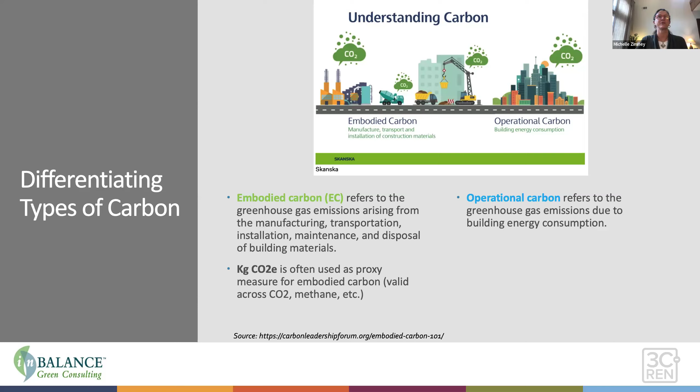When we talk about carbon, we often use kilograms of carbon dioxide equivalent, and you'll see that a lot in some of the documentation. That's used as a proxy measurement for embodied carbon. It's also the unit of measure for global warming potential. So let's take a quick look at some other terms. Here's global warming potential, and we see that that proxy measure is there. We'll talk about EPDs and HPDs.

The difference being EPDs are environmental product declarations. Those are the main documents that we look for to get global warming potential data on products, versus HPDs, which focus more on health impacts, such as toxins and pollutants.

You'll hear us refer to LCA and WBLCA. They're related, whereas life cycle analysis is a systematic analysis of the environmental impact of a product or material. A whole building LCA is an assessment using that data on building systems and materials as a whole.

And then a couple of units of measurement, because there is math, I'm going to warn you. We all know that there are things called tons, 2,000 pounds, but we'll also come across metric tons, oddly denoted in capital MT or small t, slightly larger, it's 1,000 kilograms, slightly larger at 2,200 pounds.

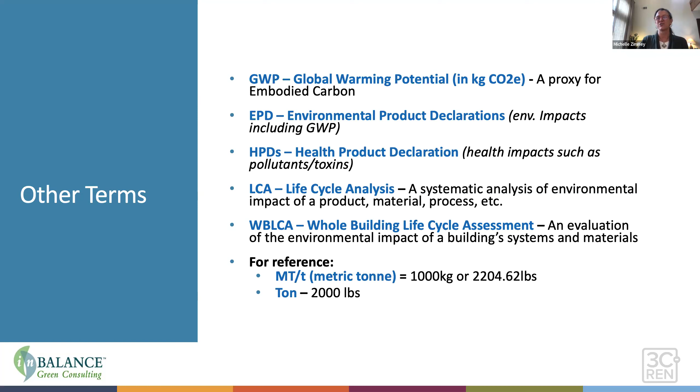Okay, so why care about embodied carbon? This graph might be familiar to some of you who attended our Zero Net Carbon Design series last year. Operational carbon in the light blue and embodied carbon in the green. And we know that up front, the embodied carbon is incurred and part of the footprint of any project the day you walk in a building.

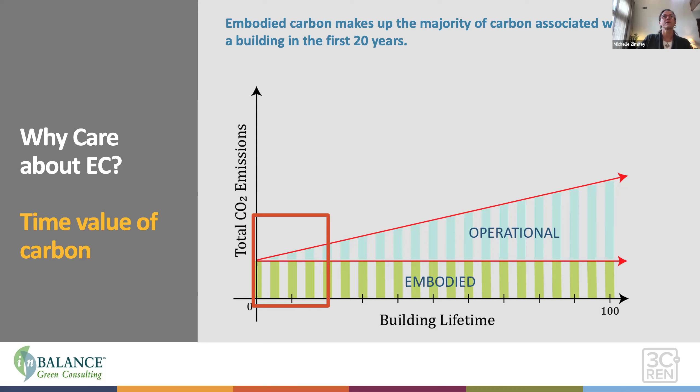And it remains the largest percentage of the carbon for your project well into the first 20 years. Something like 80% of your carbon in the first 20 years of your building is going to be embodied carbon. And so paying attention to and reducing that footprint as you build up to construction is really impactful.

Here we can see the impact on the environment. So reducing that carbon in the near term basically has the effect of getting us on a lower curve. If we reduce this amount, we'll get on a 2 degrees Celsius curve. But if we can reduce it even more in the short term, it just sets us up for a warming curve into the rest of the century that's beneficial for us.

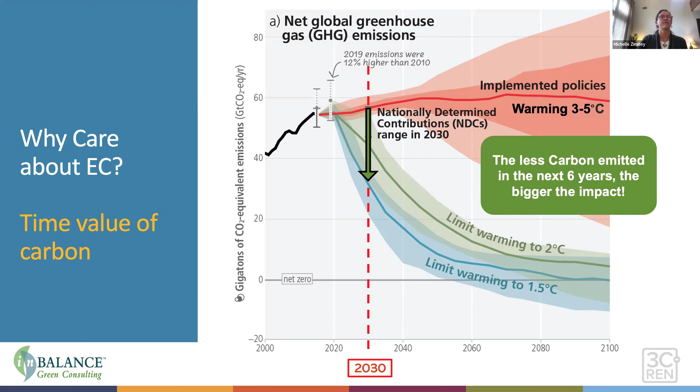Another curve to take a look at is, how are we going to do it, right? What are the steps toward getting reduced embodied carbon measured, carried out, and then where are we going with it? Right now, we've been working on sort of hitting the low-hanging fruit, gathering data, figuring out standardized forms, building calculation standards. Where we're moving to, and what you'll see in California, is moving toward mandatory reporting and mandatory limits on embodied carbon.

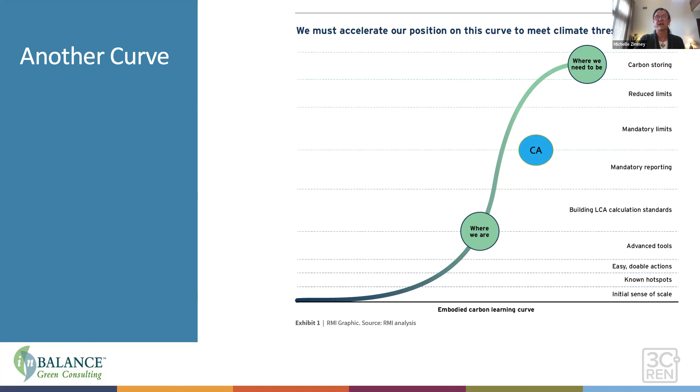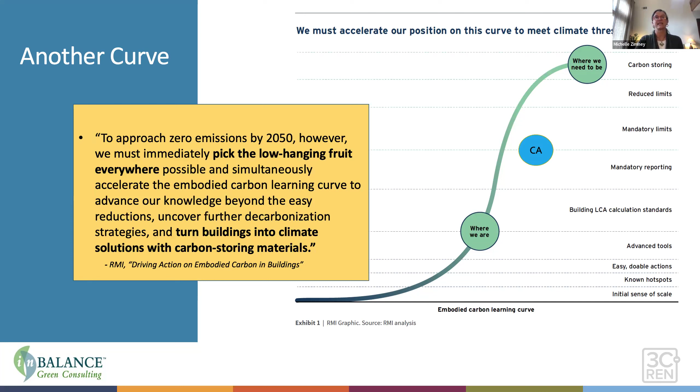We'll talk a little bit about the CALGreen, or a lot about the CALGreen today. And ultimately, where we want to go is keep pushing those limits and moving toward more use of more and more carbon storing materials, so that we can get the low-hanging fruit everywhere possible simultaneously right now as we accelerate up the curve, and ultimately turning our buildings into climate solutions with carbon storing materials.

I'm going to hand this lovely slide over to Tatiana to explain why I care about it in terms of CALGreen. Thanks, Michelle. So why care about embodied carbon? Well, starting on July 1st of this year, you will have to.

Addressing embodied carbon will now be part of the CALGreen mandatory measures just for projects 100,000 square feet or more, or schools under jurisdiction of DSA that are at least 50,000 square feet. And then in 2026, the square footage threshold for all projects will decrease to 50,000 square feet.

So if the threshold square footage has been met, there are 3 different pathways that you can use. You see those here, and we'll be going into each of these in more depth further on in the presentation.

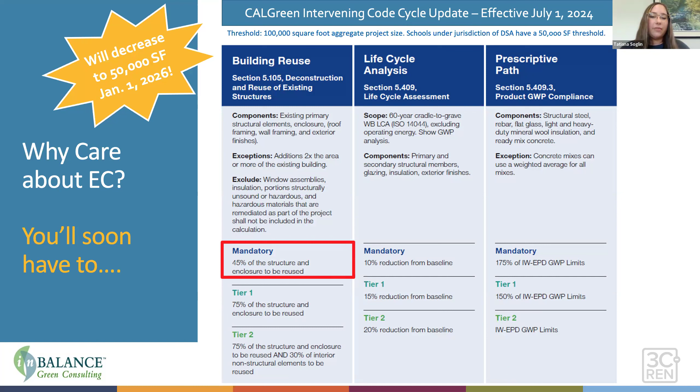So your first option is reuse for existing buildings or additions and alterations. For additions, this will only apply if the addition is less than 2 times the area of the existing building. And to meet the mandatory requirement, 45% of the structure and enclosure must be reused.

The next option is completing a whole building life cycle assessment using approved modeling software. Some of them are free, some also have Revit plugins, and you'll need to show a 10% reduction on primary and secondary structural elements from a baseline building.

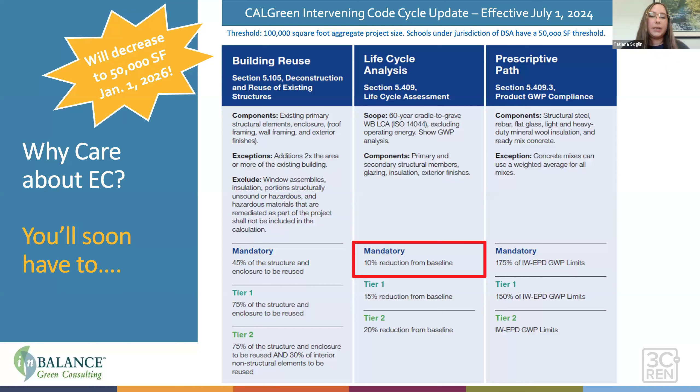The third option is a prescriptive path. So, building on the Buy Clean California program, the code sets global warming potential limits based on industry-wide standards for a few key materials, and all materials listed must come under the threshold. For this mandatory measure, the threshold is set at 175% of the industry-wide EPD global warming potential limits.

And as a reminder, Tier 1 and Tier 2 thresholds you see listed below are voluntary, but some jurisdictions may require this level as part of a reach code or mitigation. Next slide. So now we'll look at where you'll find embodied carbon in the construction process.

So you may have seen a graphic like this one before showing life cycle analysis stages and scopes. Construction is broken down into stages A through D, with A being the product stage, B the use stage, C the end of life, and D the stage beyond the building life cycle. Each of those stages is broken down further into processes like extraction, manufacturing, transport, and so on.

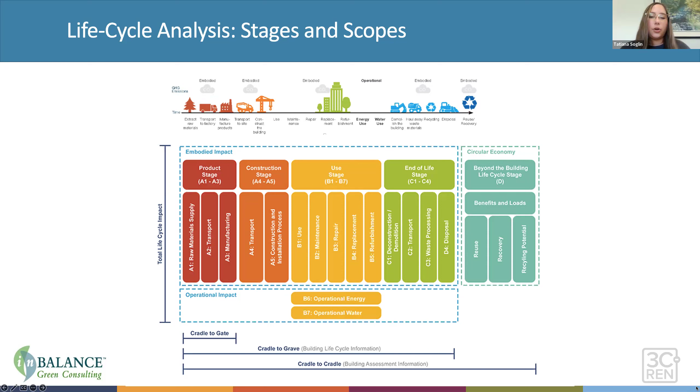You'll also notice that operational carbon has its own stages, B6 and B7, outside of the embodied carbon impact. When looking at data for product selection, you're mostly looking at information covering stages A1 through A3, but if you're doing something like a whole building life cycle assessment, you're going to look further at this cradle to grave scope that covers stages A through C.

And now back to Michelle. Thanks, Tatiana. So once we understand how the construction process is broken down into stages and embodied carbon is assigned to those stages, it's helpful to see where it shows up.

The good news, bad news is, and why we're having this particular webinar, is that it's really loaded up front. We can see here the vast majority of building product embodied emissions occur in the A1 through A3 stages. So that's extraction, manufacture, and transport.

So we have a heavy lift at the front end of building design and construction, but we can also make a huge impact by focusing on those materials and processes, reducing where we can, and getting that embodied footprint lower, or even zero or negative with some select use of materials, setting off the project on a great foot for the next 60, 80, 100 years.

Less so, we see, in the range of 5, 10, 15% for each of the following product stages. So the A4, 5, or the B1 through 5, and C1 through 4.

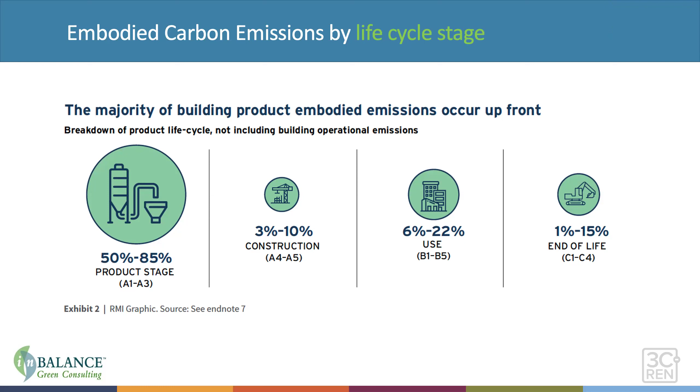Another way to look at it is emissions by materials. So here they actually have a little bit higher number, 93% in the A1 through 3, less so with the Cs. And if we take a look at why is that, where in the building are we seeing that carbon?

We've got floors at about 37%, exterior walls, which are above grade, 25%, interior walls as well, structural, coming in at 15%. And I think if you think about these materials or these sections of your building, what are they made out of? For the large part, they're concrete or steel or other metals.

And so this is what we know: something like 10%, 11% of global carbon emissions annually, globally, are from concrete production. Another 8 or 9% is from steel. So 20% or so of global emissions annually is from these two building materials. And so decisions we make will be super impactful.

And then a more granular look at what kinds of concrete, what kinds of metals. We see that ready mix is used in mixes for walls and floors, something like 40% of emissions. So targeting those in particular will make a difference.

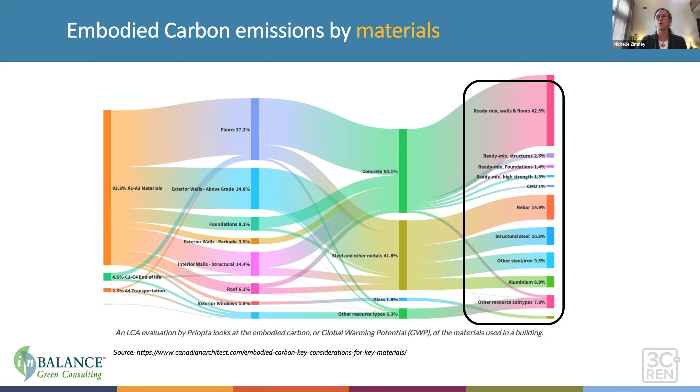Rebar, structural steel at 15 and 10%. So either selectively picking those metals and the production methods of those metals that reduce carbon, or substituting them out for other structure, will have a large impact.

I'll hand this over to Tatiana. Thanks. So here we're taking a look at some of the high impact material categories for cost-effective low carbon product selection. As we know from the previous slide, concrete shows highest impact reduction percentage potential at no to low cost premium by substituting cement with alternative cementitious materials.

Next, with rebar, we can also see a potential for up to 10% reduction by using rebar with high recycled content. Similarly, structural steel with high recycled content can also make a significant impact.

Insulation is another one that can make a big difference by using cellulose or mineral wool batt insulation instead of foam. Glazing is one that can have a bit more of a cost premium, but using low carbon window frame materials and specifying no more than 2 panes of glazing are effective strategies that will reduce embodied carbon.

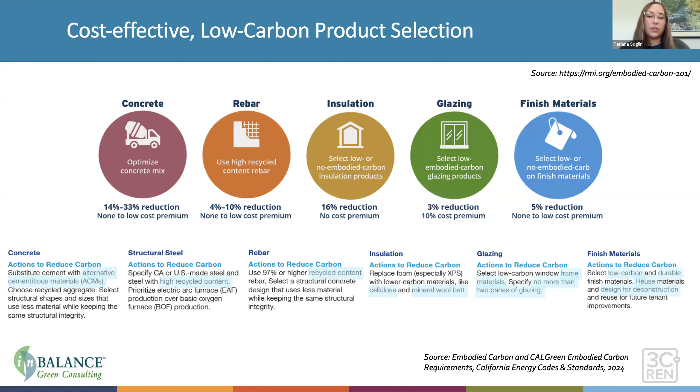And lastly, finish materials can also contribute by using low carbon and durable materials. And when possible, reusing is best, or designing for deconstruction and future reuse. And now Michelle will take you through some design strategies.

So when we talk about this focus on materials and selecting particular mixes or recycled content, we wanted to situate it in a broader framework for design interventions.

So up front, I think we've all heard the old adage: the greenest building is the one never built. The second greenest one is the one that gets reused. And we see this emphasis on reuse in the upcoming CALGreen Code. Here we want to just emphasize that: reuse, reuse, reuse, because all that embodied carbon incurred on the footprint of the initial building is essentially saved with reuse.

Right-sizing buildings, minimizing the space, helps us reduce the amount of material used and produced. Once we are building out, reducing the amount of material that goes into an assembly—dematerializing, simplifying finishes—and optimizing systems so you minimize the excess material.

And then here's the focus that we have just been looking at: carbon storing materials, product substitutions, looking at EPDs, and substituting out for less impactful products.

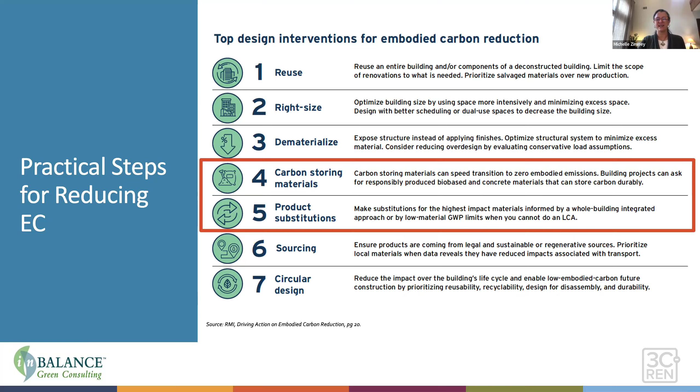Okay, good questions. All right, so like I mentioned, we're going to move into CALGreen and the methods of compliance and documentation for everyone, because that's just on the horizon.

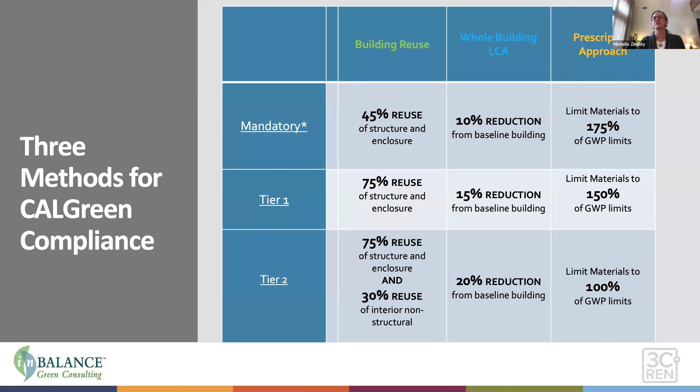Let's see, I think this is the same information we had in a little bit simplified version. We've got three sort of approaches as a reminder: building reuse, whole building LCA modeling, and a prescriptive approach. Let's start with the reuse.

A slide with a ton of text is always a little daunting, but we did want to get it in front of you because we know that these get sent out and can go into your files, and it's an easy way to just pull up the code without having to go into the full document. Here we're just highlighting the elements that pertain to the reuse code.

We mentioned before that you need to document a 45% reuse of the existing building's primary structural elements and its existing building enclosure. Notably, this does not include window assemblies, insulation, or any sort of hazardous materials.

There is no incentive to try to keep really bad windows or bad insulation around. Go ahead and replace those. They don't count against you.

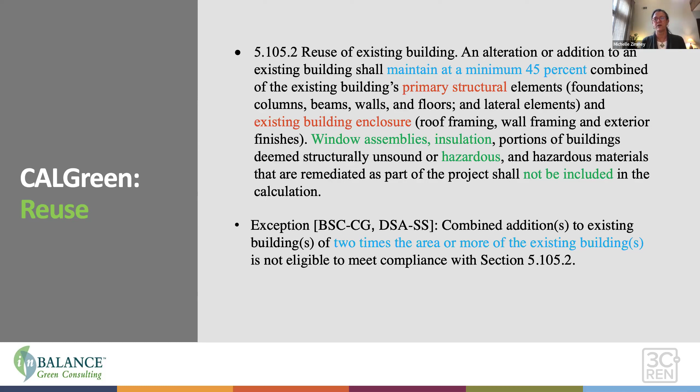It's important to note that if the existing building is part of an addition, the addition needs to be less than 2 times the area of the existing building—so no more than 1/3, 2/3. And we'll have some examples shortly.

Okay, so how do you know which method you're going to have? Say you've got a 45,000 square foot existing building, and you want to add 50,000 square feet. The first question is, is it going to even trigger this CALGreen code of a minimum of 100,000 square feet? In this case, no—so building A, you don't even have to deal with these compliance methods. Let's say instead there's an 80,000 square foot addition.

It is going to exceed the 100,000 square foot threshold. And so then the secondary question is, does it meet that 2 times limit? Is the addition greater than 2 times the existing square footage? Here, it is not. 80 is less than 2 times 45. And so that will qualify you for this reuse documentation that we'll move into next.

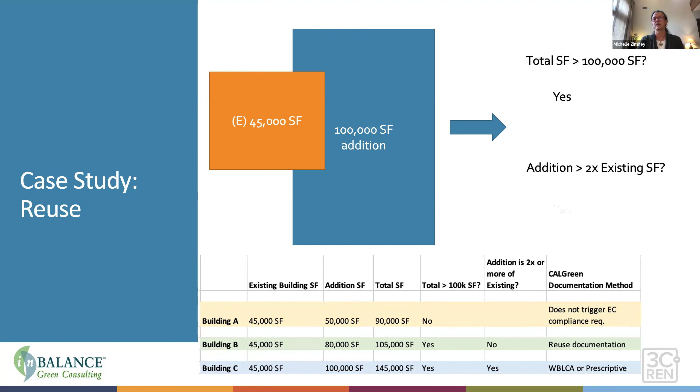On the other hand, an addition slightly larger of 100,000 square feet is going to trigger the overall threshold and is more than 2 times the existing square footage. And so then that's going to move you into the whole building LCA or the prescriptive methods.

Okay, so then how do we do it? It's a really simple worksheet, it's worksheet 3 here at the bottom. As I move through some of the calcs, I'm just going to be populating it. So with reuse, you're just documenting the existing building square footage and the aggregate additions if applicable. So I've got 80,000 in there.

And if we just then focus on the existing building, let's say it's got some dimensions, and as a reminder, we're looking just at primary structural elements and existing building enclosure. So a quick spreadsheet, you make yours as you like, obviously.

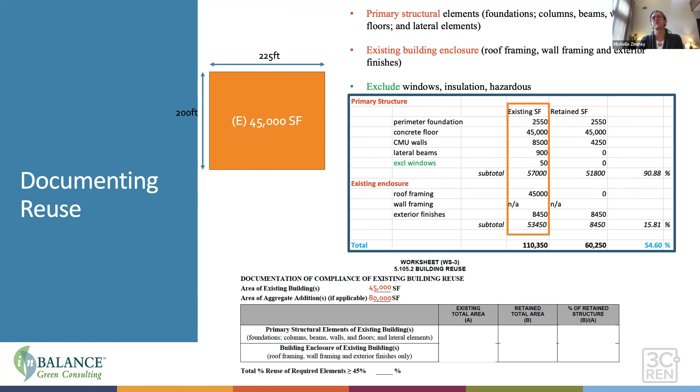I've got the foundation, the concrete floor. This building, let's say, has CMU walls. It's got some lateral beams and 2 5x5 windows. So I'm calculating the windows, but those will not be included in the subtotal. And I take these subtotals, oddly, they want it by those categories of primary and existing enclosure, and I just drop them into the spreadsheet.

And then I'm going to calculate the retain. So I'm keeping the foundation, keeping the floors. Let's say I'm keeping half the walls, demoing the beams, excluding the windows. The roof framing is going to be gone, and I'm keeping all of the exterior stucco. Got those numbers into the retained total area.

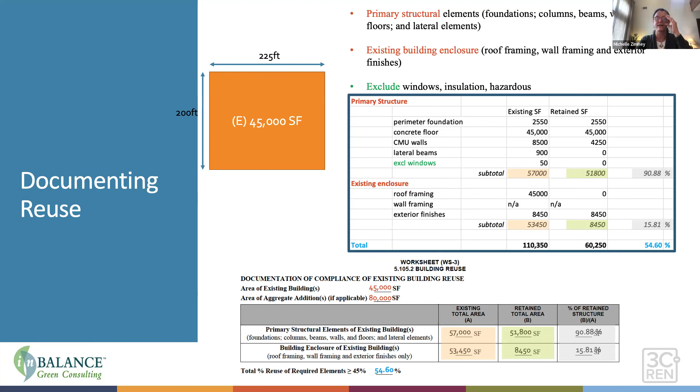Calculating out via these sub categories of primary structure, existing enclosure, and rendering these subtotal percentages. And then the overall total is in blue of 54.6% reuse. And that's pretty much it. That'll get you, you'll submit that with your plans to show compliance for building reuse. Let's have Tatiana run us through, let's see, was there any questions on that? No.

So let's hand it over to Tatiana then for a little more complicated approach in the whole building LCA. Thanks, Michelle. So another little bit of a wordy slide here, but our second method is completing a cradle to grave whole building life cycle assessment with a 10% reduction in global warming potential compared to a baseline building. So this assessment will need to have a reference study period of 60 years. Included in this analysis are enclosure components, including glazing, insulation, and exterior finishes, and primary and secondary structural members, including

footings and foundations, structural columns, beams, walls, roofs, and floors. And we want to note that the difference in scope between this method and the building reuse method is that glazing assemblies and insulation are included here. So we get a lot of questions about how to find a baseline, and the code is going to direct you to these ASTM guidelines below, outlining that the baseline building in the comparison must have the same location, orientation, size, function, and space conditioning as the proposed building, and the materials shall be based on typical design construction practices

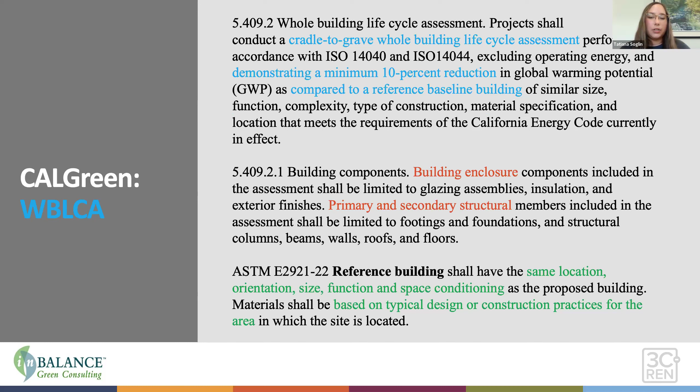for the project type in the area where the project is located. So in practice, architects we've worked with tend to generate their baseline off of materials they've used in previous projects that are a similar building type to the new one they've designed.

So this slide here shows how structural elements, envelope materials, and finished materials typically have higher embodied carbon content. So for the whole building life cycle assessment, the CalGreen scope focuses on the big ticket items, including these structure and building envelope categories, plus the footings and foundations. And while finishes can also have an impact, they won't be required to be included in the assessment at this time, but it is optional to include them as part of your scope.

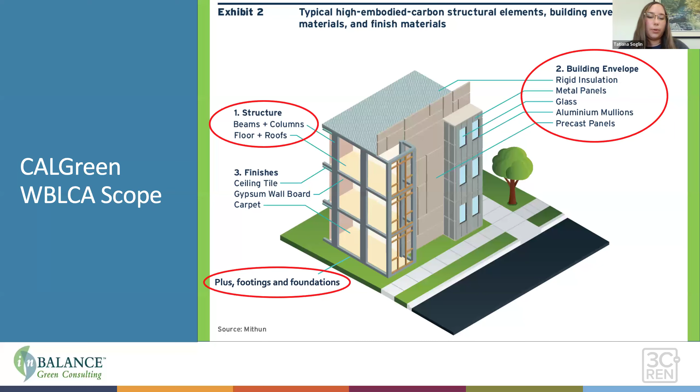Just for an example, this is what a project looks like in Athena. How it works is that projects are modeled using a trunk and branch structure. Users can quickly describe building assemblies through dialog boxes that request simple information like bay sizes and loads, and the software does the rest. It'll calculate a bill of materials and the associated environmental impacts for you.

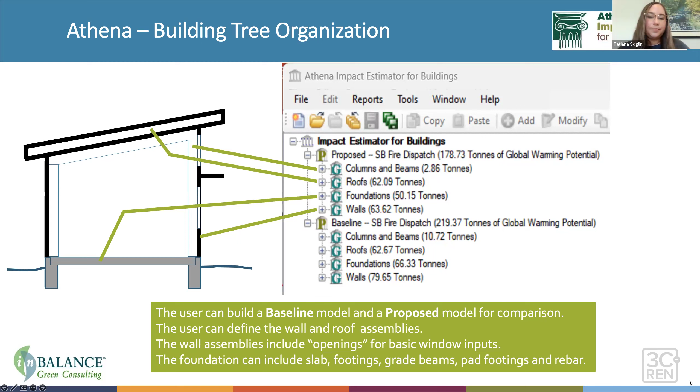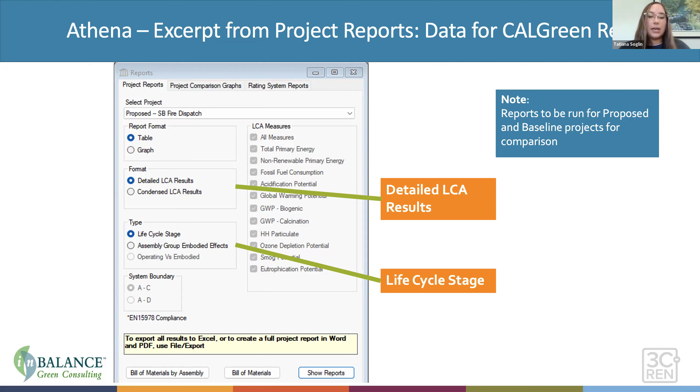So next slide. After you're done building all your components for your building that will be included in the scope for this method, you'll want to generate your report. First you'll select the project for the report. For this one, you'll want to do a baseline case and a proposed case, so you'll be generating 2 reports. We'll keep the report format as a table so we can see all of those values. Define the format by selecting detailed LCA results, select life cycle stage, and click Show Report.

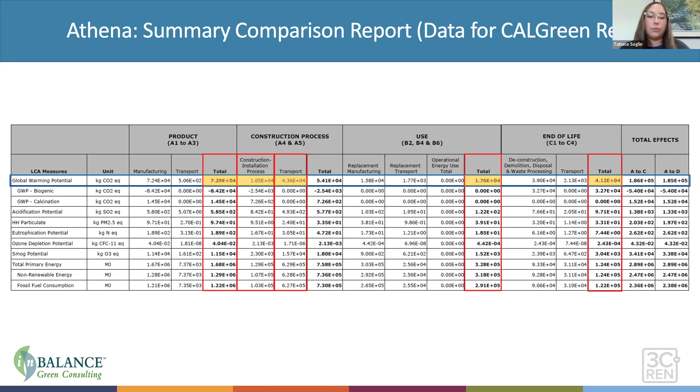So you're going to do this again for both baseline and proposed, so 2 reports, and we can compare those values. In addition to the documentation stated earlier, depending on your jurisdiction, this worksheet WS-9 might be required by the enforcing entity to demonstrate compliance.

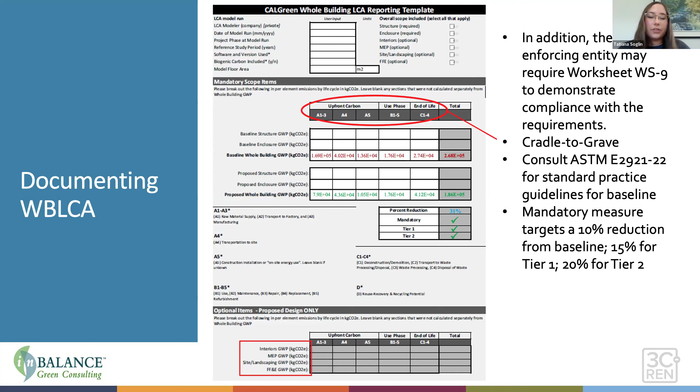And this worksheet also shows other optional materials that can be included in your analysis. But as a reminder, it's just those structure and enclosure elements that are required. And now back over to Michelle to take a look at our last method, the prescriptive pathway.

Thanks, Tatiana. So this is the third method for those who might have a simpler project or don't want to engage a full modeling software approach. It's similar to other prescriptive paths in that there's tables and thresholds that you just have to meet, and it's all or nothing. So the way they're talking about it here is the data that is provided on permanently installed materials listed in table 5.409.3 need to be documented with type 3 environmental product declarations. We'll talk about that shortly. And they need to be of a type that's either product specific or factory specific.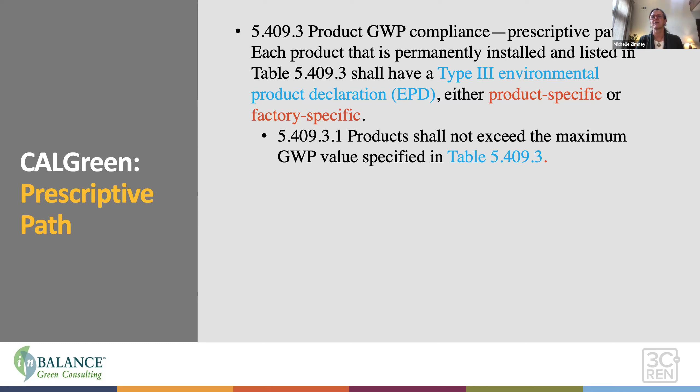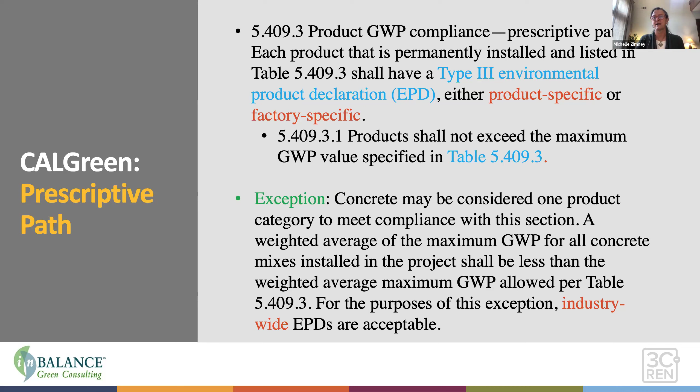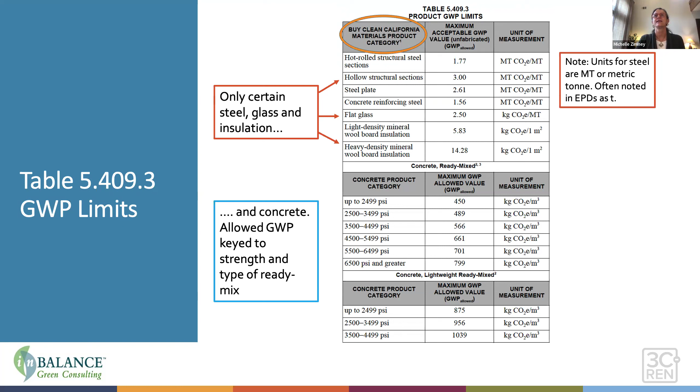That's an important note there, because it will help you find EPDs that are compliant. The lower half of the table is the concrete, and you can see here that it's keyed to the strength of the concrete mix you're using, and each strength, whether it's ready mix or lightweight ready mix, then has an allowed GWP value in that center column. The GWP data for both the top half and the bottom half of the table will be found in EPDs.

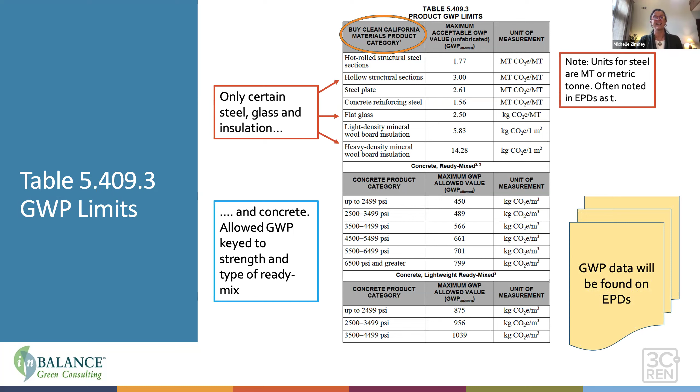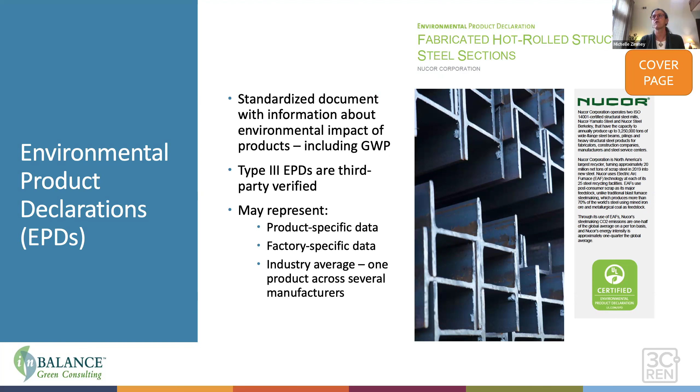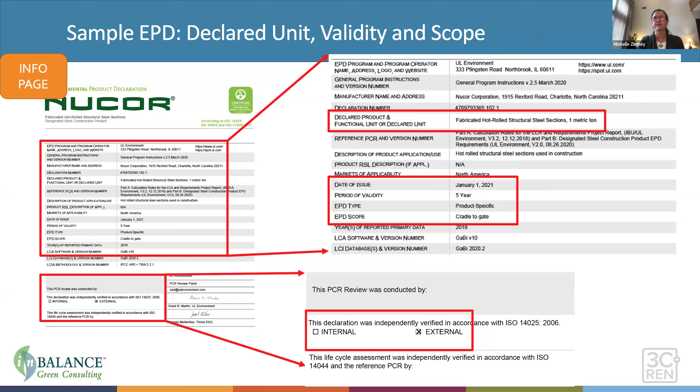It is that product specific EPD type, and the scope is noted as cradle to gate. Then here you'll see whether it's third party verified or not, and a check mark in the external verification will show you that it's going to work for this particular use.

Unfortunately, the table calls out a different unit of measurement, metric tons of CO2 equivalent per metric ton. So somehow we need to rectify the kilograms of CO2 with the metric tons of CO2 for our unit of 1 metric ton of steel.

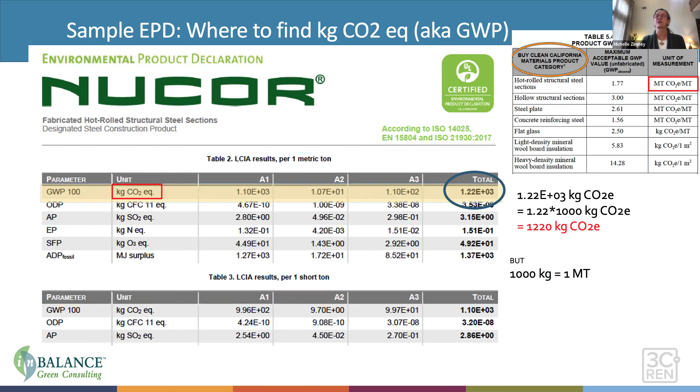So I'll do a little bit of quick math. Basically, E plus 03 means times 1,000. So we'll take our 1.22 and multiply it by 1,000, resulting in 1,220 kilograms of CO2 equivalent. But notably, a metric ton is equal to 1,000 kilograms. So if we want to get to the units required in our table, metric tons per metric ton, we'll divide by 1,000, bringing it back to 1.22 metric tons of CO2 equivalent per metric ton. Now we've got it in the units we can report in our documentation.

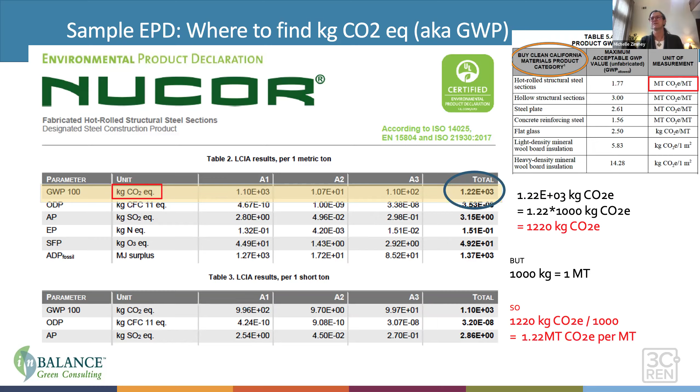There's no particular form in the code, so you might generate your own tracking document, something similar to this table, where you need to list each required material. Again, there are 7 currently, and that's the upper half of the table on the left. So I've got those under my material column.

You may or may not use each type of material, so I've got N/A for instance on some. I'm showing the Nucor manufacturer for the hot rolled structural steel. The maximum allowed GWP is 1.77, pulled from the table. And in our product we have 1.22, both in metric tons of CO2 equivalent per metric ton. So we're coming in under that threshold.

This product would be compliant, and you would just need to follow that process continually, repeatedly per material, and fill out your table for submission. I think a summary table would be helpful, but the actual data that needs to be submitted is those EPDs for the materials used in the project.

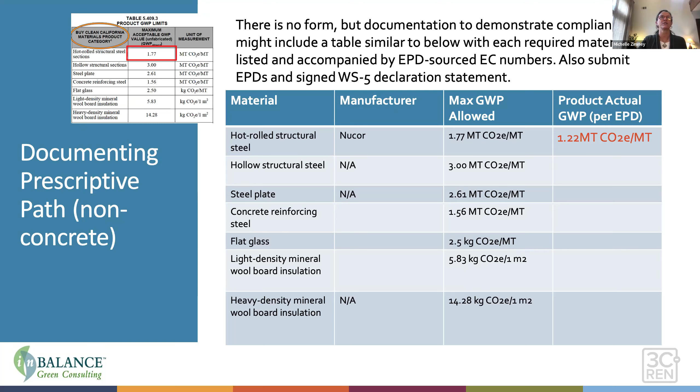And that's how you approach the non-concrete materials, again limited at the moment, so pretty doable depending on the scope of your project. If we then move on to concrete—I'm sorry, there's a little bit of delay in what I'm trying to get done here.

It's going to be a different approach. We still use the table, but we need to do a weighted calculation. So let's take that 100,000 square foot addition, for instance, and document it.

I'm going to pause for a moment and see if there are relevant questions. What are the custom concrete mixes to reduce EC? I'll get to that in a second, concrete.

So where did the 1.77 metric tons come from? That's just the limit set by the state of California, and it's based on 175% of the standard data reported for a product or an industry, depending on the material.

A question about whether it's known how the code will be adopting products with sequestered carbon, like Blue Planet aggregate. Great question. We're going to talk a little bit about carbon sequestering materials at the end. I do not know at this time how or when or if those sort of futuristic or cutting edge materials are going to be incorporated into the code. It would be fascinating to see where the code starts moving once those materials come to market.

I see Blue Planet, okay got it. Thanks for the questions. And I did have a note to myself to take a breath here because it gets a little bit math intensive.

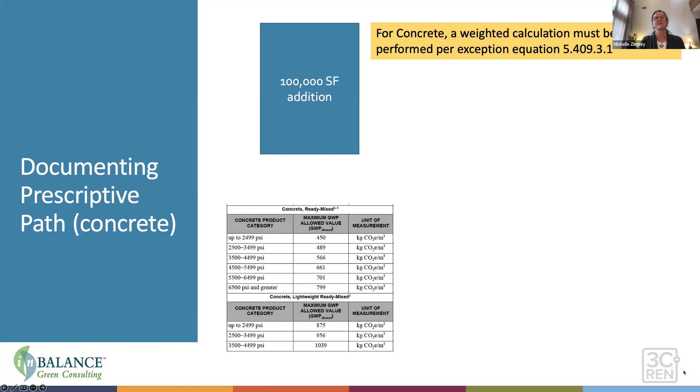Here's the bottom half of our table, with the different strengths and the maximum GWP in the center column. This is the equation we're going to have to use.

Basically it's the GWP of N, where N is each concrete mix that you're going to use. So if you've got a mix for your perimeter wall, a different mix for your slab, and another mix for maybe some columns or beams, each of those mixes will have a GWP that will be multiplied by a volume to get the overall carbon for that mix used in the project.

It'll be compared against the GWP allowed, which is basically the GWP value in the table times the volume again. Let's take a look at what that might look like, just to block it out a little more—the GWP N is the GWP per concrete mix.

That is found in EPDs, so that is specific to the mix that you install. You would probably speak with your local concrete manufacturer to get some of that data, or pull up EPDs and see if you can match the component recipes.

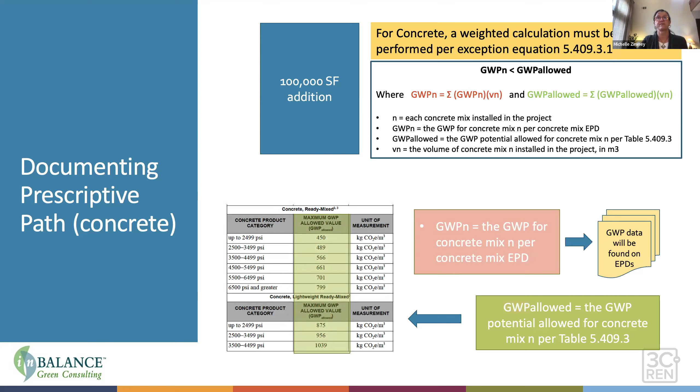The GWP allowed is found here in the table, so the installed versus the theoretical threshold. Let's take a closer look at the numbers here. There's our equation, and here's a quick table.

In this one, I've got three different mixes: a foundation, slab, and columns, keyed out at different PSIs. I've calculated out some volumes, and the unit here is going to be meters cubed. So we're going from square footage and other data points, takeoffs, to meters cubed - you'll have to do a little math there.

We're going to pull up the GWP of each of those mixes, and this is going to be found in EPDs that you'll get through an EC3 tool or similar. You're going to multiply it by the volume to get overall embodied carbon for the mixes that you're installing, and that's going to be compared against what's allowed. So where do we find what's allowed per mix?

We go to the table. Here, the top mix for our foundation at 4,000 PSI is going to be allowed to have 566 kilograms of CO2 per meter cubed. So we're going to take that limit and multiply it by the volume of 108 meters cubed, or 1,000, or 12, depending on your mix and your volumes, and get the overall carbon incurred or allowed to be incurred for the volume and strength of concrete that you have in your project.

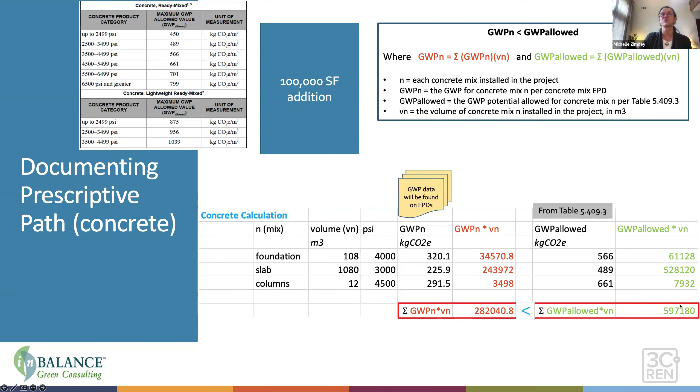I don't see any more questions coming in, but I'll let that germinate, and we'll just move quickly to our final section of our presentation, where we're looking at future materials and how we're going to move toward buildings that are carbon storing structures that move us higher up on that curve.

So a quick note about carbon sequestering materials. We all know that trees perform that function for us, drawing carbon down as they grow. But there are other materials such as hemp, straw, ag residues, seaweed, cork, mushrooms, bamboo, even algae. And why are they important?

If we look at the typical carbon incurred for building projects, we've got that steep rise for the initial manufacture, and then we've got a less steep slope as we incur operating carbon over the life of the building.

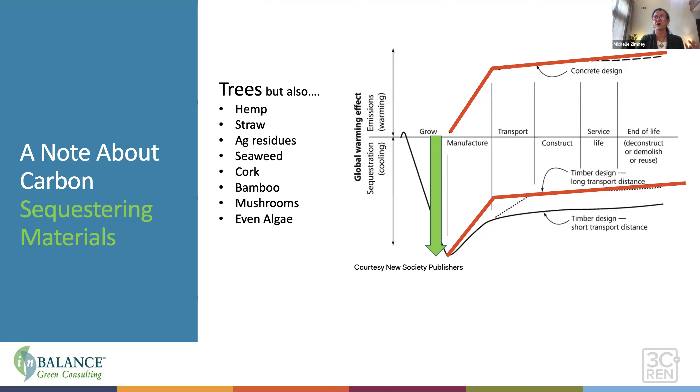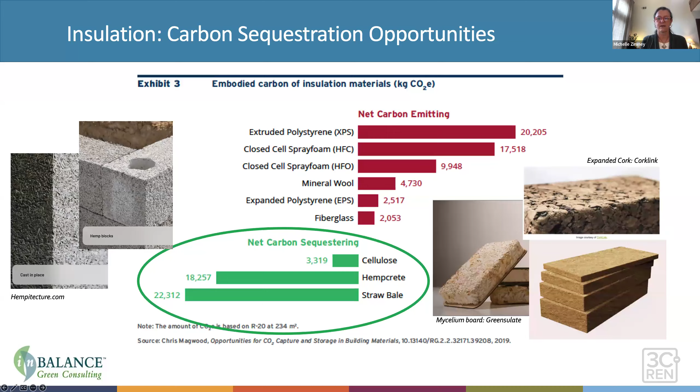And to get the right mix, that's where we refer to - call your local mix manufacturer and see what they can make, what aggregates they can bring, or what cementitious material substitutes they can bring to the mix that's going to suit your use, your strength needs, your curing needs for the particular project. I'm hoping that satisfied your question, Rebecca. Let me know if there was a follow-up.

Oh, here she is: Do you also anticipate embodied carbon calcs to eventually come to residential buildings? What would the potential timing be? I haven't seen or heard any specific single family home requirements for that. I think logically it would tend that way, but I have no specific information, and I have no idea on the timing. It's moving pretty quickly, from a 100,000 square foot threshold now to half of that in a year and a half, basically. So I think it's definitely worth looking out for, but not immediately impactful.